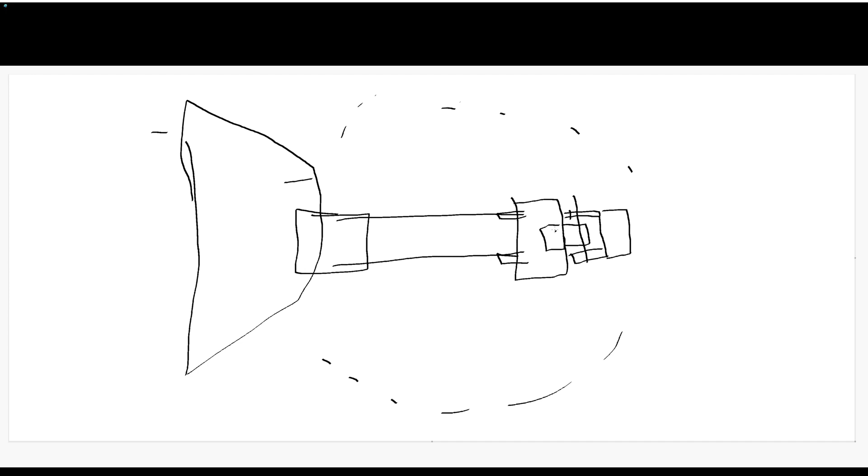And then the second part is a second 3D printed structure which connects the spars to the hinge so that the canard can move up and down. And then we've got our hinge, which is just going to be another carbon rod. Sorry, on the second part, we also have a servo. And then the third part will connect the hinge to the canard.

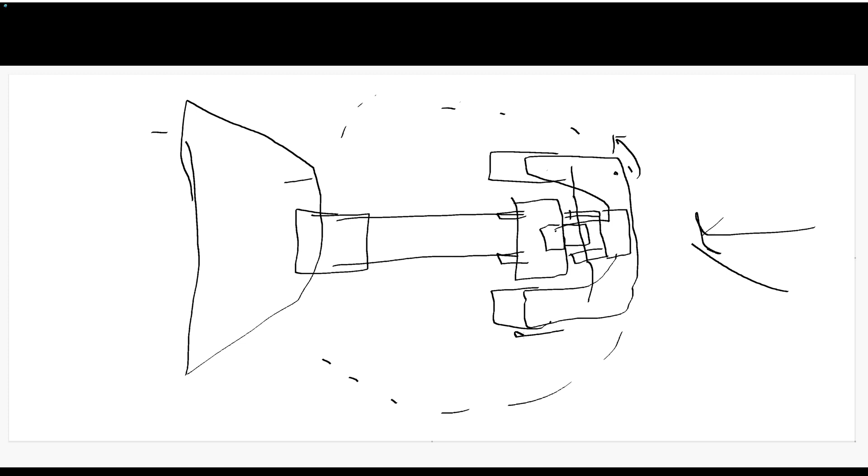So one thing is because the wind's coming in from the front, we've got to make the back part of the canard longer than the front part of the canard. And that's for stability. Because if the front part's longer, then when the wind hits it, it's either going to want it to point down or want it to point up. But if we make the backside long enough, then that's what's going to catch the wind, and we're going to have a stable system where it just wants to point straight.

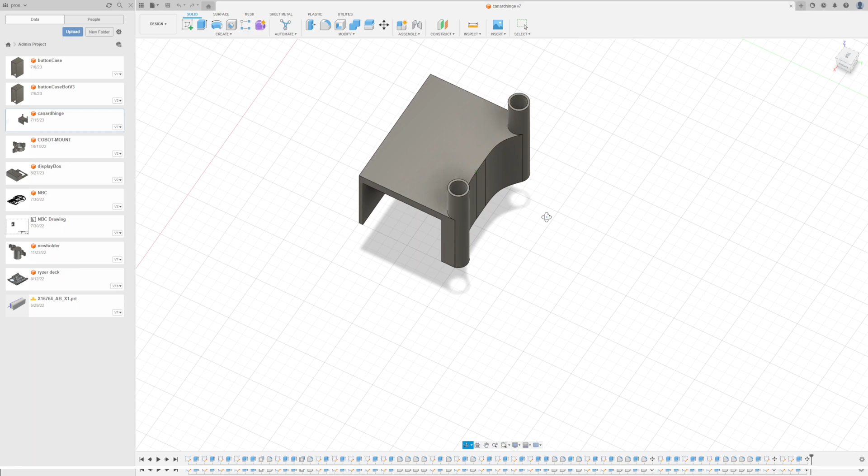So this is the Fusion 360 of the three parts. This is the first part, and as you can see, it's got the holes for the tubes, and I also added a slat in the middle to make sure that it glues onto the parts correctly. Then we've got our second part, and you can see the two holes, the place for the servo, the place for the hinge. And finally, we have the other side, which is a hinge, and it's got a place to attach to the canard.

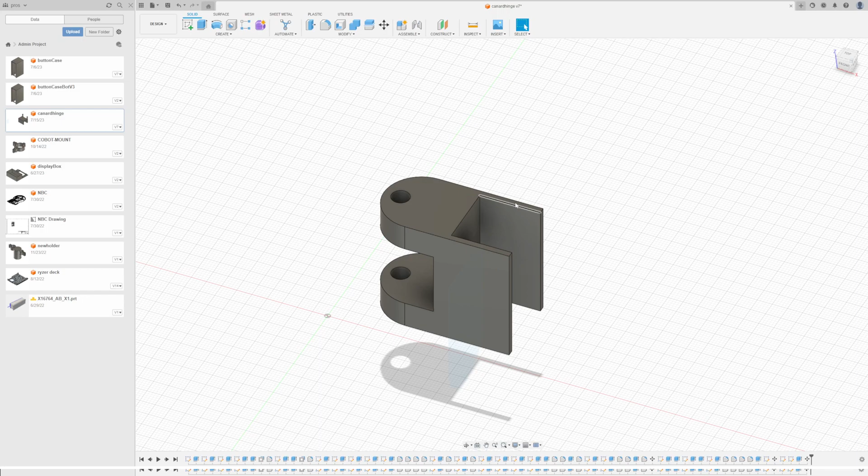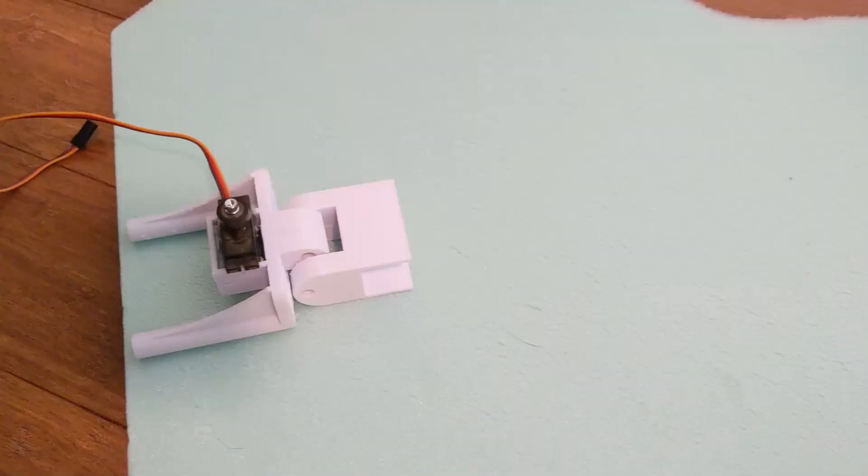So this is what it looks like roughly put together. There's the delta section, the rods, the other side, the servo, and the hinge. Alright, so the wing needs to be somewhat boomerang shaped. So I'm just laying the hinge mechanism here, like that. Okay, so it turned out a little smaller than I was thinking. That should be fine because this isn't really a lifting surface, it's more of a control surface.

Alright, so next thing, because the front is so small, I'm going to mostly go with center of lift from the delta wing, and that seems to be about here, and it's already kind of balanced there, so I'm going to put the battery about here. But we got all this space right here, and this area is pretty good structurally, so I think I'm just going to cut it out right here and just sink it in.

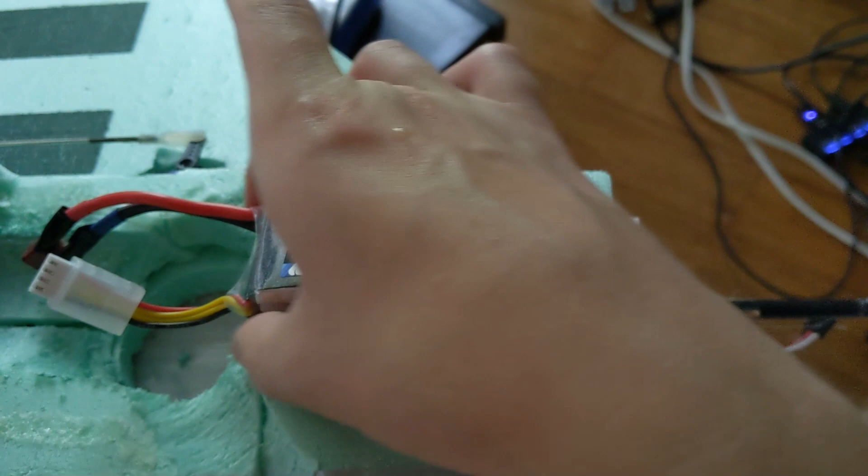Alright, so the battery's in there, everything's set up, I got the remote, and so if I crank this up, so that's that, and then I've got elevons, well, they're really more like ailerons, and then finally up front. I'm gonna have to figure that out a bit more though. I don't know if I like the range where it's at, but at least it's working.

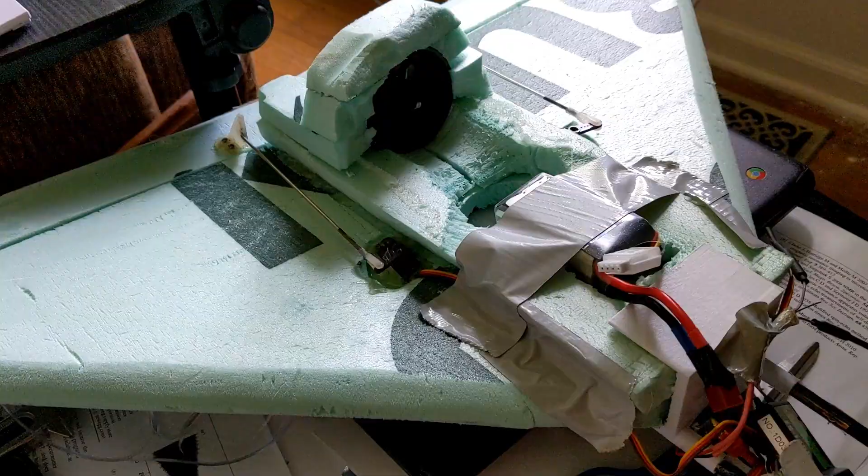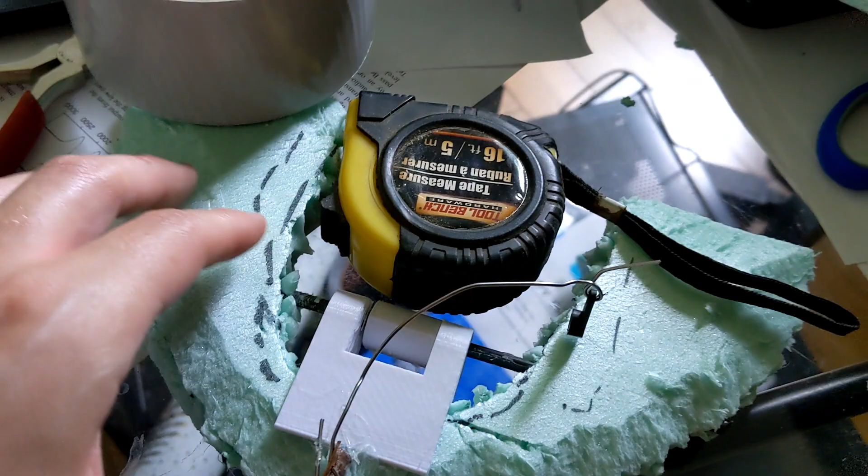So the damage wasn't too terrible, like I expected. Basically the whole front of this broke, so I can always just reprint this part. This hinge looks fine. I don't know if I want to switch out the front canards, but it looks fine. And the wing's broken, but that's just a little duct tape and hot glue.

The real thing is I've been watching the crash in slow motion, and there's I think three things that can be improved on. One, I still think it might be useful to drop in an autopilot, so when it starts to roll for no reason, it can instantly unroll. Because I had roll control, but I felt like I was just trying to fight it, trying to level it the whole time, up until the end, and then it just started spiraling.

Two, it feels heavy, and that could just be because I can't get it to fly straight and hold itself. It's always tilting and crashing. So maybe if I can get it to fly straight, it doesn't matter how heavy it is. And three, it might have been front heavy. A delta wing is kind of hard to figure out where the center of lift is. Plus, I don't know what this is doing. So it could have been front heavy, and it did kind of feel like it was arcing, or the trajectory was just one long arc. So that might be an issue.